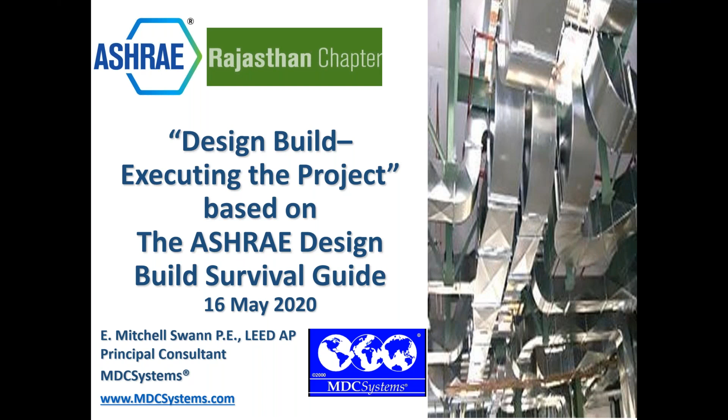So very quickly, our learning objectives today. Basically, we're going to try and get an understanding of the design build execution strategies, some methods to get it done, some concerns and cautions, things you need to watch out for. Now, as I understand it, design build is becoming a much more popular execution strategy in India and actually around the world. And there may be some aspects of our current condition that accelerate some of that. But one of the things about design build is it is a collaborative kind of process, and human cooperation can be both very useful and at times not so helpful. So that's a thought to consider.

So I don't know how many people are familiar with design build or have done it, but design build is a process where the design build entity holds all the contracts with all the trade contractors. It also holds the design contract. So the design build entity, and I say entity because there are different ways they can be formed, has all the risk of performance, design, and workmanship, as well as cost. Okay, so they basically carry all the risk. The owner hopefully gets a single point of responsibility. The owner only has to talk to the design builder, and the expectation is it would save time and money on the project.

So, as I mentioned, why do it? That's saving time and money. As you can see from this slide here, and I'll try and illustrate with my cursor, the thing that is predominantly the savings is that whole bidding process is somewhat removed, because with a set of preliminary drawings, one should try and get a full price established and then work through detailed drawings. So at a minimum, you hopefully would save the time it takes for a bid process, a tendering process, or you can save even more, because using a preliminary set of documents, you can begin construction. And so now you are working on portions of the drawings and simultaneously constructing other portions of the work.

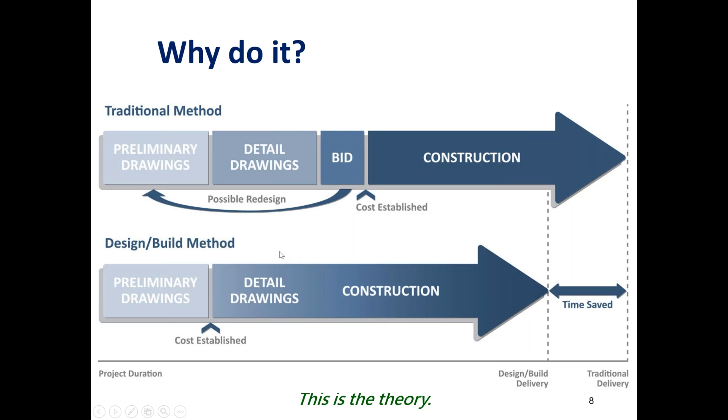So what about the dynamics of the market in India specifically? And keeping in mind, time and money are the two drivers that are making people want to go into design build. Coordinated work, time and money. First thing to think about is that construction makes up 7 to 9% of the GDP of India. It's responsible for about 40 million direct and indirect jobs, so it's a very big component.

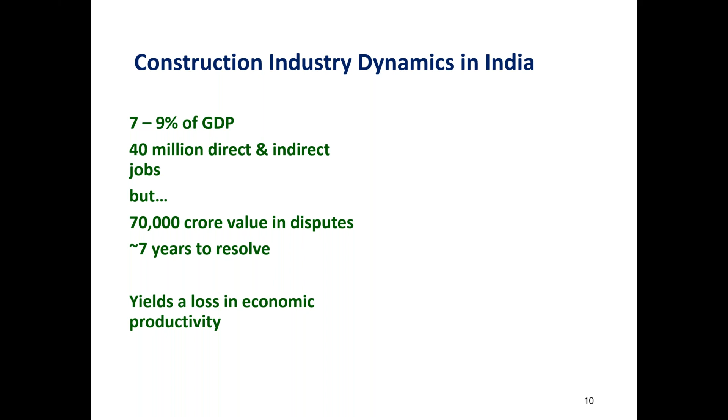Now, one of the big drivers of project productivity loss, number 3 on the list of factors affecting productivity of labor in India, is amendments to the drawings and specifications. And so one of the positive aspects of design build is it should greatly reduce changes in drawings and specifications to the contractor, and that should hopefully speed up productivity, which saves time and money. So that's the big driver.

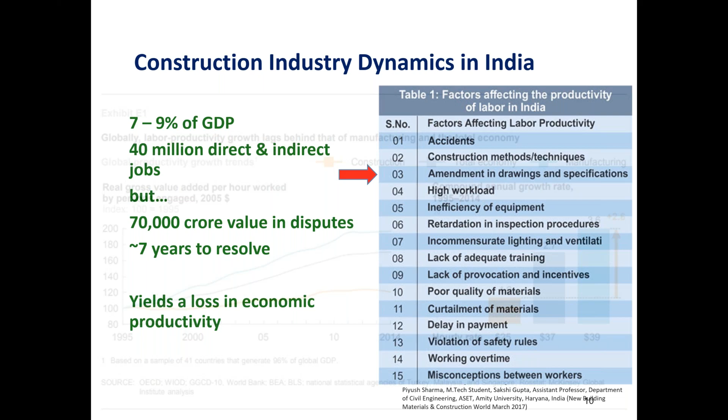Now, how does that relate to construction in general? On a global scale, if you look at this orange line right here, construction productivity has changed very little over the past 30-35 years compared to the manufacturing world, where you see automation and robotics, and the general business or total economy. The financial industries, everyone else has gotten a lot more productive. Construction, not so much. And that is a big problem because that is a difference in value that can add to the economy.

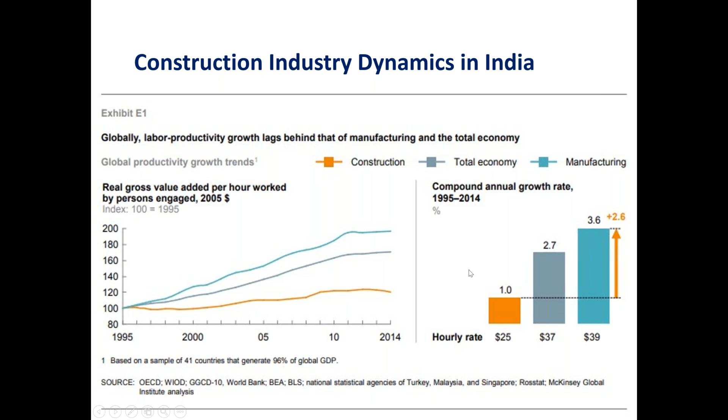But there are some concerns. Why would you not want to use design build? If it saves time and money, what are the possible reasons to not use it? One would be getting professional services, engineering and architecture, by non-professionals or people who are unlicensed. Unlicensed practitioners can be a problem. In most instances, licensed engineers and architects have an obligation to protect public health, safety, and welfare. That's a component of their license.

An unlicensed practitioner, a person who's not an architect but pretending to be one, and there is an issue with that I've seen from the IIA in India, or a person saying that they're an engineer but they are not, could expose the public health, safety, and welfare. And in the midst of this, as we deal with the COVID issue, you can imagine how that might become even more important or more sensitive to people.

There is also another concern. Typically, in the design, bid, build world, you have an owner, a contractor, and a designer. And the owner has a separate contract with each. And one of the things that you hopefully get out of that is a dynamic tension between the designer and the contractor. Contractors tend to focus on cost and schedule. Designers focus on different things. They may be looking more at long-term operation or reliability or other things that are not as easily placed in dollars and cents immediately.

Especially with owners that don't have a lot of experience, there can be some issues with their understanding of what things cost and what it takes to get a project done versus their expectation, what we often refer to as champagne taste and beer money. So that can be an issue. And that is more prevalent when you have an owner that does not have a lot of experience in building. They don't know exactly what things cost.

Then there's also this issue of, since you don't have full specifications, you have questions about substitutions. Can you make substitutions? Are they really substitutions? If you're a design build firm, what was the owner expecting versus what you're intending to deliver?

Now, this is an area which I think actually occurs on all types of projects, but keeping in mind that you've established a price very early in the project, if the needs of the project change, an owner changes their mind or starts adding things, you get into scope creep. And I'm sure no one has ever had a project where the requirements have changed throughout the project. I think that happens to everybody.

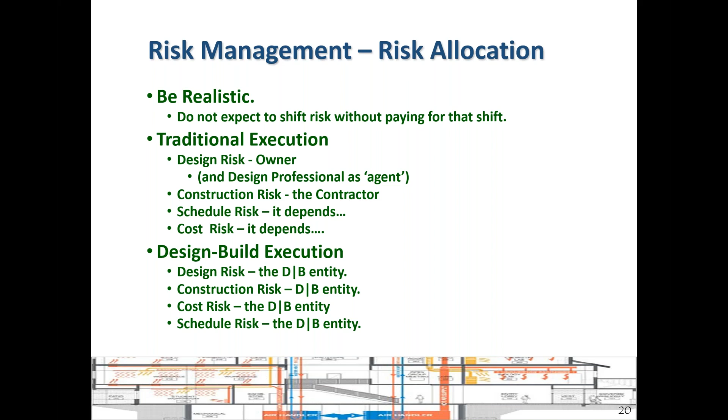So now, setting up these business entities. Corporations are a structure, a separate structure. You need to think about how it's going to be owned, what's going to be the risk exposure, what kind of assets, taxes. You can talk about partnerships, okay?

You have general partners or limited liability partners, and they have different levels of exposure and risk. Limited liability companies, which is sort of a hybrid between a corporation and a partnership. And you have different ways in which the liabilities break out. You should talk to an accountant and an attorney to work out the details of those items, depending upon your marketplace. And I understand we have people from different places here.

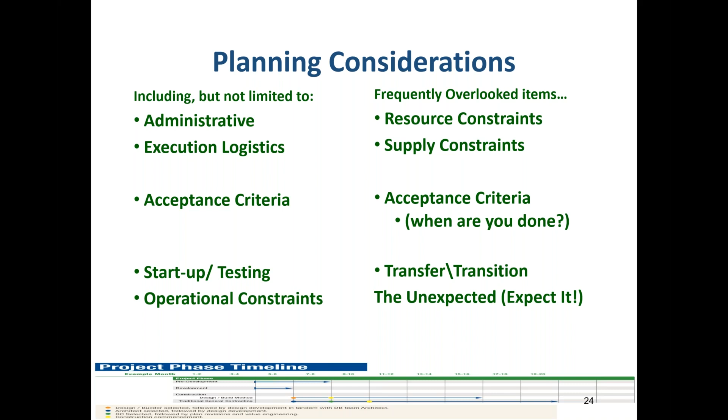So early on, I think it's important to identify your assumptions, keeping in mind that you do not have full documents. You need to think about your resources, labor, materials, and equipment. Can you get things there in time? Is there enough qualified labor to get the work done? What kind of project conditions you might have. Infrastructure, existing infrastructure. Is there sufficient infrastructure to get the job done? What kind of transport or communications you might need. And then there's other things.

If a client has an existing series of buildings, they might wish to use the same control system or limit the type of equipment that you can use in order to have consistency across their platform. That is very useful for an owner and it makes a lot of sense. But if you haven't thought about that in your proposal, you could find yourself having trouble with pricing or deliveries.

Okay, if he says, well, I can only use a certain manufacturer for all my pumps. I did not price that manufacturer. I'll have to go change my numbers. So you need to be very careful and clear about what you're putting in your project. As I mentioned, the neighbors, what are the conditions that I'm going to be constructing in? Okay, and then of course the testing and turnover and what the economic drivers are for his project.

So some concerns for the designer. As I mentioned earlier, there is that sort of tug of war between construction cost and schedule and design intent. And it is very important for designers to remember that in the design build context, they are a partner with the contractor as well as, let's say, working for an owner.

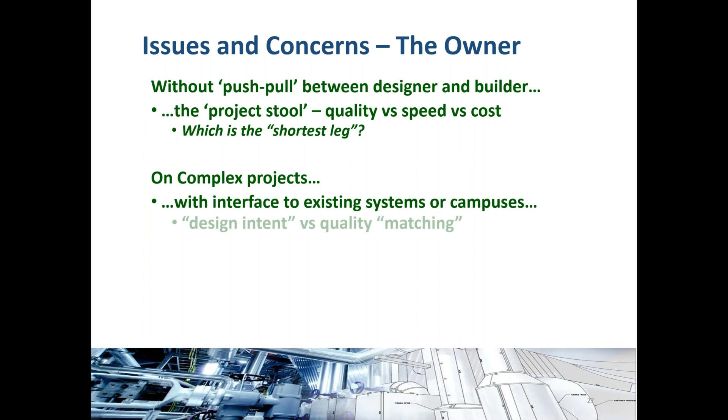So from an owner, without that push and pull, that tension, tug of war between designer and builder, projects can be often talked about as having a project stool. You have, I can do it very well, high quality. I can do it very fast, high speed, or I can do it for very expensive, high cost. You can control two items in there.

You can talk about quality and speed, but the cost will change to satisfy those requirements. You can talk about speed and cost, but your quality will change to match what speed and cost you have. So you have to be conscious of what you're trying to control to, okay? Typically, builders think about speed and cost. Designers think more about quality and cost. And so you can have a little bit of a pull as an owner. If you don't have internal people who can help you with that, you could run into a problem that way.

On complex projects where you have to match up to existing systems, there is a question about getting the best price on your design build project versus matching up to your existing systems. And then of course, as an owner, you have to have very strict self-discipline. You can't let yourself change your mind constantly on the project.

But what is a good useful thing to do is get unit cost pricing data or a menu schedule of values for certain elements, or you can put a cost allowance in for areas that are on hold or awaiting some detailed design, okay? Areas where you might not be certain. That pops up in high-tech buildings like hospitals or laboratories often.

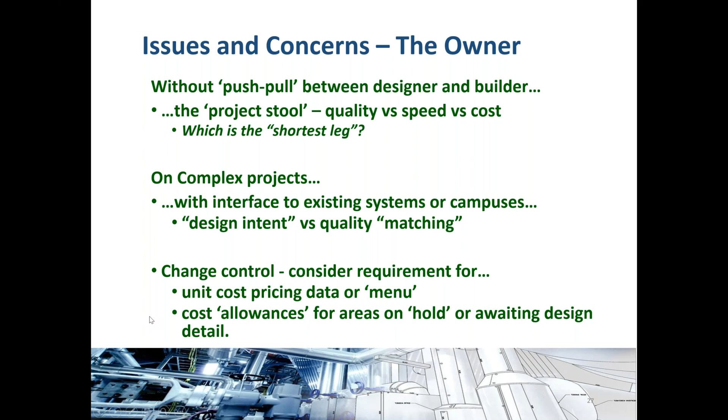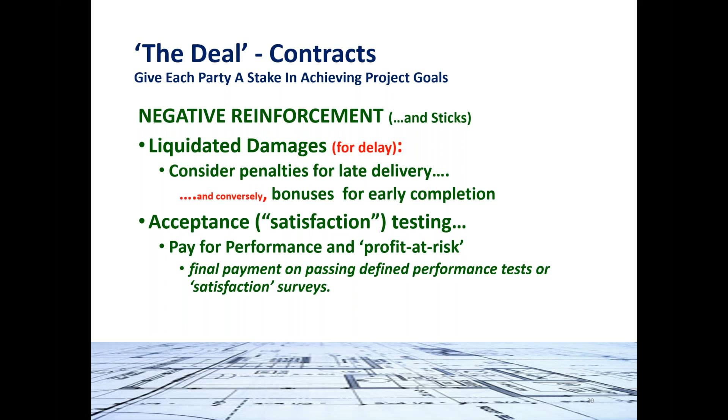In India, I looked into the contract world. I don't see a lot of standard contract forms, but it seems that FIDIC, and I don't know if people are familiar with FIDIC, is used fairly regularly in the industrial market in India for design build work. This would be FIDIC's Yellow Book, and that comes out of the International Federation of Consulting Engineers, which is headquartered in Switzerland, I do believe. But FIDIC, I've seen a lot in international work.

And then there's the Indian Institute of Architects. They have a set of contract documents, but I've not seen a specific design build contract document amongst them, but that might be a way to go. You can look into American forms too, but there's one other that I'll talk about a little bit later.

So, utilizing it effectively: team skills, owner experience. Does an owner have experience with design build and how it differs from design bid build? That can be important. Your design build entity qualifications. Are you familiar with the type of work? Are you familiar with each other as you're forming an alliance?

Do you have the proper incentives? You want to make sure people are motivated in the right way. And you want to try and have as much of an alliance as possible and not strictly a business relationship. You want to have a strong working relationship, okay? You're going to have an integrated planning process. You want to bring people into the project early. If you're going to do that type of work in design build, you want to get cross-disciplinary involvement on your team.

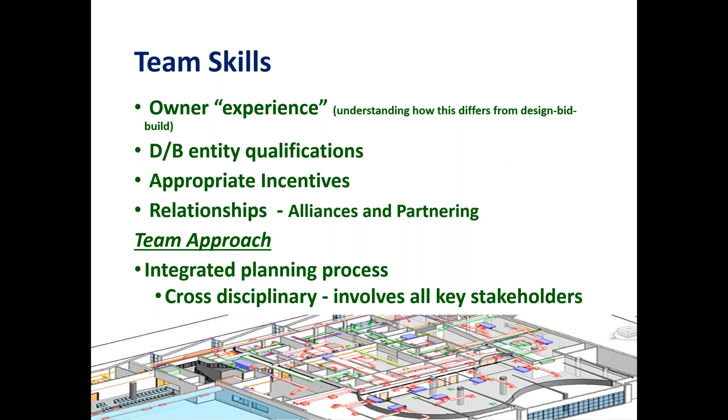Why is planning so important anymore? Projects are a lot more complex. We have a lot more high performance targets. People are looking for sustainable buildings or net zero buildings and things like that. That requires a great degree of sophistication, okay? Adaptability. People want future proofing. They want their buildings to be able to live into the future, adapting and changing with different requirements.

New pressures on things like resiliency, because changes in the environment, changes in climate, floods, things like that are making it much more critical to think about early planning so that I can deal with these kinds of abnormal situations. And of course, the integration aspect of getting the project delivered well.

It's always important, and one of the drivers of design build: how quickly can we get this project done and online, and what is the return on investment or life cycle cost for the capital expenditure. So time and money continue to be the drivers of most of these projects, but now we have these other outside or additional elements that people are looking for. So planning is key.

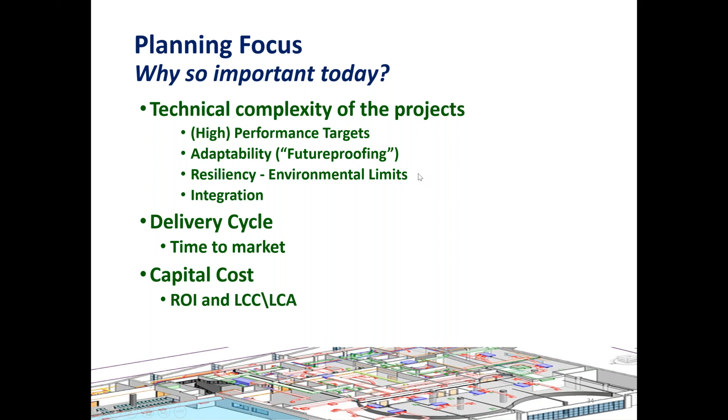A design build project is often basically a performance project. So it's very important to understand the scope, what is going on, what you're providing in the project and what you are not providing, okay? And I think a lot of times people do a pretty decent job about what they are providing, but they are not very clear about what they are not providing. And sometimes it is hard to determine exactly where the break line is. So you need to be careful about what you're not doing, okay?

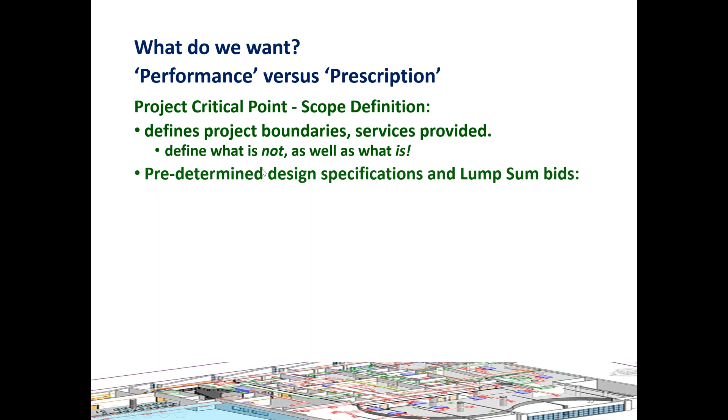There are some projects you have to be careful about, because a lot of design build work is done with a lump sum bid, okay? And so it's very important for you to manage your process to keep in line with that lump sum. And you need to be careful about implied or expressed warranties.

From an owner's perspective, you should be looking at capacity, you should define quality level and some performance requirements. You should be clear about what you want post-construction, what kind of training, how long you want them to be on site, or as a warranty goes, and what kind of documentation you want, okay?

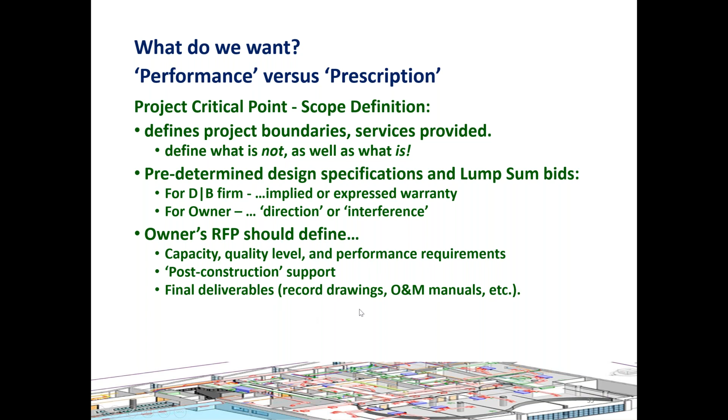Because remember, you don't necessarily have the same sorts of things that you'd have in a design bid build project going into construction. So you need to tell the design build entity, I want record drawings, I want as-builts, I want O&M manuals, because there's no specification to tell them to do that. And if you have some goals or testing or acceptance criteria, you should specify that in writing.

Schedule compliance, critical element. It's very critical, and for the design build entity, you're going to be responsible for that. If there's spots where you need the owner's input, indicate where on that schedule you need them and where they need to make decisions. If they don't make certain decisions in a certain time frame, you have to document that event, tell them what the impact is, and let the owner know, because it's very important that the owner make timely decisions when necessary, okay?

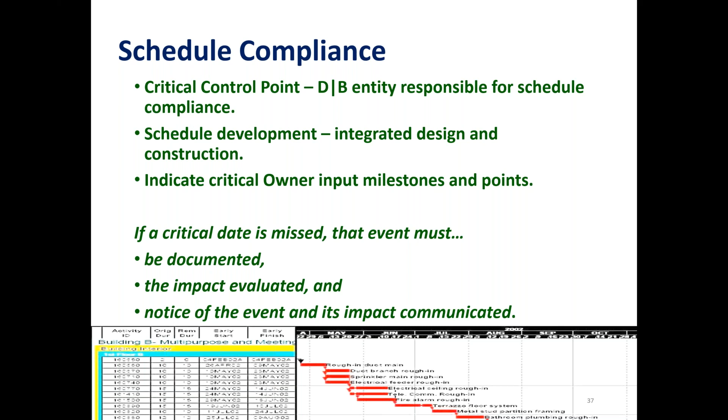As I mentioned before, you're going to have less design documentation when you start the project, but at the end of the day, the same work is going to have to be done. So it's good to think about how you're going to manage that value, okay?

The type of documentation will vary from project to project. What I need for a commercial office building may be different than what I need for a hospital. More complex projects tend to require more detailed scope documents or RFP information. You'll see something referred to as a two-step design build or a bridging set. And in complex projects, very often there's a bridging set of documents. It's a more detailed RFP than just what's written on a page. It's going to be maybe some more complicated drawings and things like that, okay?

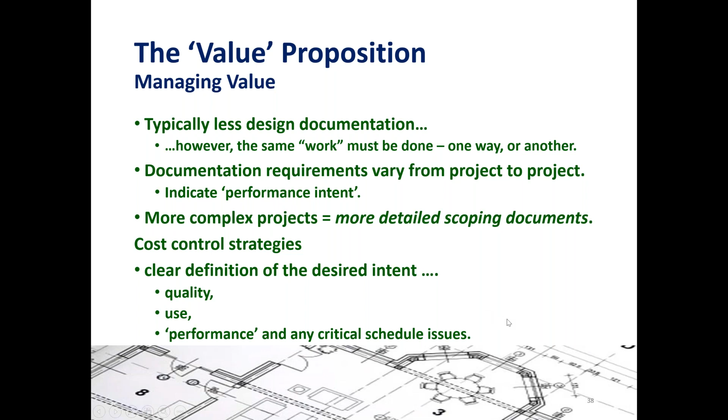You need to think about your cost control strategies, the desired intent, what you're intending to do, the type of quality, how you expect to use it, and any sort of performance or critical schedule issues that you see in the project.

Okay, so from a delivery perspective, clients in a design build sometimes think that they get to step away and not have anything to do with the project. That's not true, but also they can't get so involved that they eliminate the flexibility that design build gives you, okay? So you have to be very conscious to guard against scope creep or change orders, because it's very difficult to negotiate prices on change orders in design build. They often end up very expensive. Clients, owners, you have to be careful to not have your people interfere with the ability of getting the work done, because that's going to cost time and money.

Now, a question is, as I mentioned, you don't have that tension, that tug of war between design and construction. So how do you as an owner get the quality that you expected, or get the quality that you paid for, what you thought you paid for? That's going to be up to your RFP, your request for proposal, or request for quotation that you issue out, okay? You can't determine the construction means and methods. If you do, you potentially impact the cost. If you want something done a certain way, you need to define that up front.

The quality control and quality assurance, in large measure, the design build entity has to self-referee their performance, because they don't have an outside person. There's not a contractor having an engineer come in and make comments, or a contractor making comments on an engineer's design. It's all one entity. So you're self-refereeing, you're self-controlling.

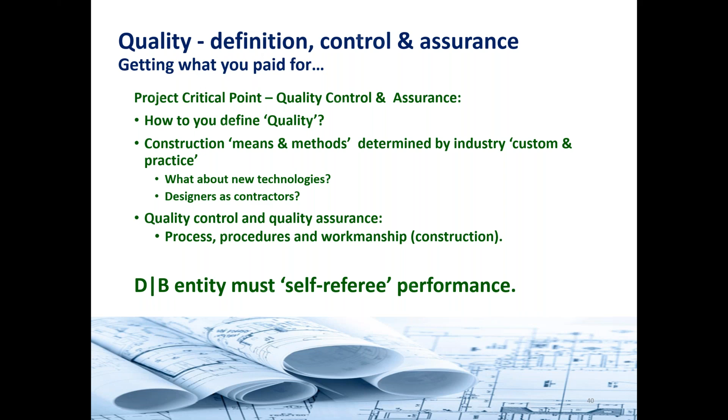Any additional risks? For the design build entity, price risks of products in the marketplace, schedule guarantees, if you have a plant performance guarantee, there could be some sort of site-specific risk, obviously logistic and safety. Those are always things in contracting, but for a lot of design build firms, engineers in design build, they're not used to thinking about these. They don't usually deal with those items. They don't deal with price risk in the marketplace, okay?

For an owner, you will still have site conditions, generally speaking. You will have any legacy issues, things that they're connecting to. An item that does pop up on occasion is who owns the design from an intellectual property perspective. If you put one building up as a design build, does that owner have the right to take those same documents and go bid to do another copy of that building someplace else? That becomes an issue.

Dispute resolution. One of the goals of design build is to reduce the number of disputes, okay? There are disputes that come up. Portions of that come in a failure to meet, let's say, the owner's intent. And that is because the RFP might not be clear about what the owner's intent is. If there's a hard schedule, for example, you're doing a school, there's a very tight, fixed schedule. Failure to meet schedule will be a dispute.

Failure to meet a budget, and that can be a very complicated argument, because if I've given a budget and it's a lump sum bid, a hard price, the owner has not interfered. If it goes over, that's an internal problem for the design build firm. And I've actually seen those issues pop up regularly where the contractor feels that the engineer that was subcontracted with him has problems getting the work done.

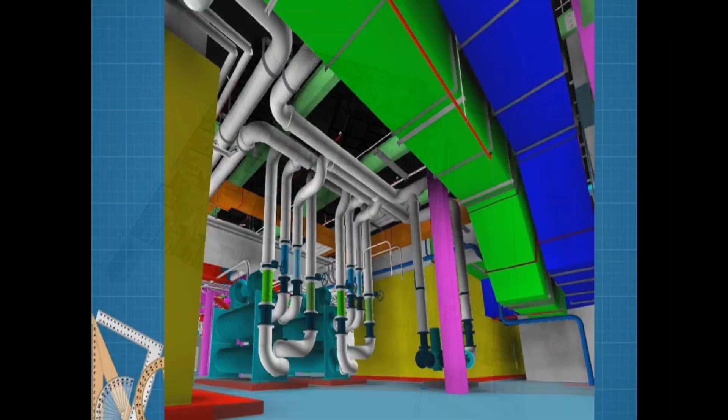If you do your VR, virtual reality, well, you can actually have an owner put on those little glasses and almost experience being in the room before you build things. It's a great way to control, oh, I didn't know it was going to work like that, or I'm not comfortable with XYZ, before you build things. It takes a bit more time at the front end, but it hopefully reduces the amount of problems at the back end of the project.

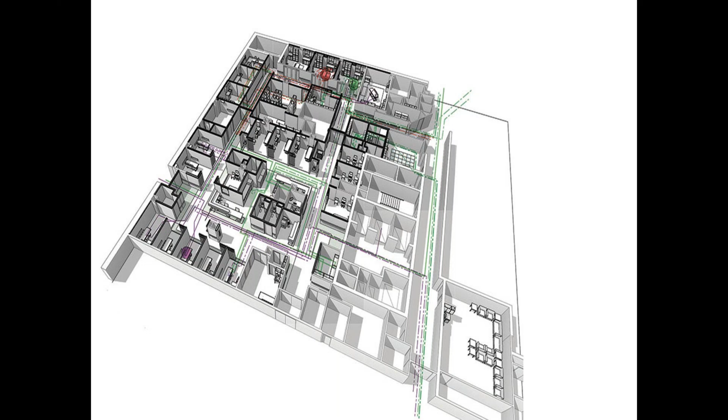In the world of BIM, there's sort of the 3D version, which is just sort of the model. But you can talk about 4D, where you tie the model to scheduling elements. You can talk about 5D BIM, where you're tying construction schedule as well as pricing, okay? 6D, where you can start doing energy models and other things like that, predictive energy models or operating energy models based out of the model, okay? And then 7D is where an owner is really using it as an asset management tool.

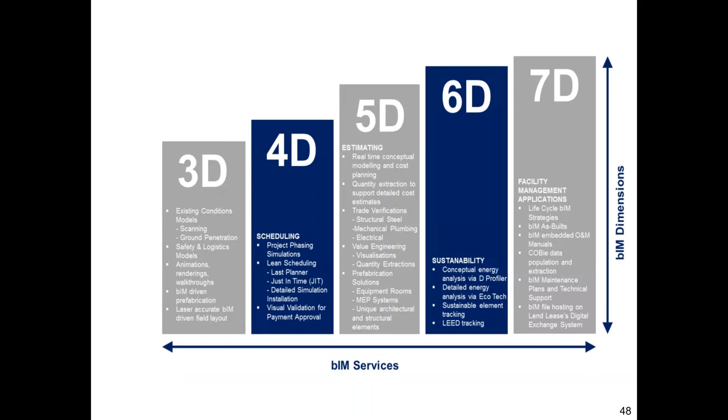We are slowly seeing, and I would say right now we're comfortably in a lot of projects, 3D and 4D, and 5D is creeping in. People are using the sustainability models, but they don't use them as an ongoing operating tool, but this 7D is coming. Another area, you start hearing about people talking about digital twins, okay? You can build a city block, you can build a whole complex as an electronic model, and then you can compare that to what your actual is doing. That's where the industry is going, a high technology industry. And the purpose of that is improving productivity and cost performance.

I suspect you are seeing more and more in India off-site or modular construction. That's going to be another big element. And that, of course, has a lot of tie-ins to BIM. Because of BIM, I can do modular construction in a great way. And there's a lot of advantage to that. Quality is better on a factory floor than it is out in the site. It's safer, and I can deliver things quickly. Some drawbacks. It's not very good for dealing with changes because I've already made a bunch of stuff and brought it out to the site. So it's not as flexible, but improved quality, lower cost generally, and faster delivery.

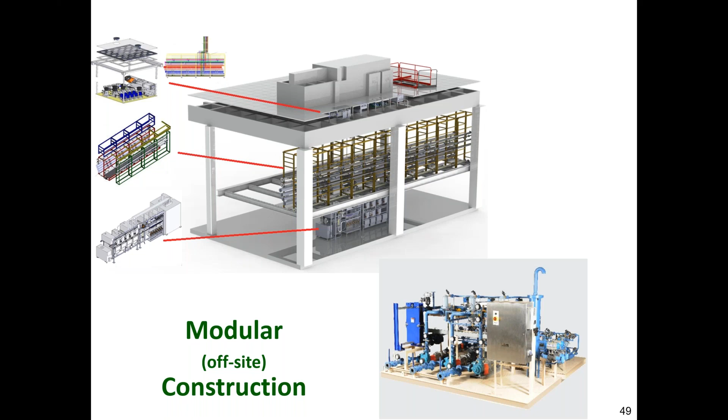The modular construction market is growing. You'll see it a lot in health and housing, but now you see it more in hospitality, healthcare, educational institutions, and the Asia Pacific modular construction market is projected to be, well, this is 2018, about $20 billion. But as I mentioned, improved productivity, better quality control, and reduced waste compared to on-site fabrication. It's going to be a big thing. BIM helps it.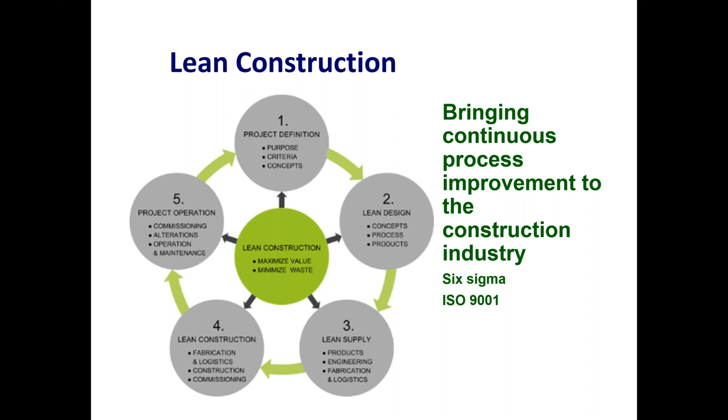I don't know how many people have heard about lean construction. Lean construction is an approach to delivering capital projects in the construction phase. It's like a Six Sigma continuous process improvement for construction. Back to that chart I showed where the productivity of the construction industry has been relatively flat for about the past 35 years, where all other productivities have improved. This is an effort to improve that and have less waste in both time and effort and material waste on the construction site. Lean construction is the thing you're going to see. And to an extent, design build overlaps with lean because of that coordination and better communication between members of the team.

Other types of projects that you'll see. Design build is here, okay? But you have variations on design build. Design build finance, design build operate, maintain, okay? Those are all variations on that theme. Design build transfer. You'll see that happening much more in the world of public-private partnerships. And you're probably seeing PPP jobs go on as people, especially municipalities, try to find ways to execute projects with limited capital. So that's going to be a bigger thing. In order to participate in that, you need to be able to participate in some of these components. When you start talking about finance, that usually requires bigger firms because they have better finance capability.

An item I kind of touched on: has anyone worked with the New Engineering Contract? It is a contract developed by the UK Institution of Civil Engineers. I've seen it used in the UK, Australia, New Zealand, Hong Kong, and the Republic of South Africa. Its big points are plain language clauses. It's very simple, not a lot of legalese lawyer talk.

It's very modular, so you can take portions of it and add sections together to get the kind of project you're doing. It's very adaptable, and it's very much focused on collaboration and alliance work. The first was the NEC3 family, which I think came out in 2005. But recently, there's the NEC4 new members.

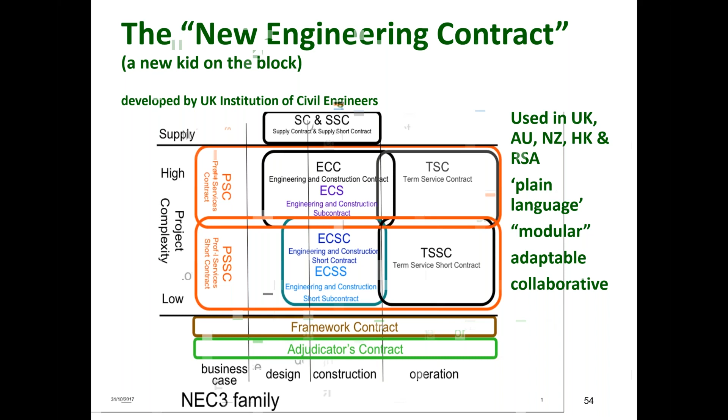They've added the alliance contract, which is partnering, integrated design, integrated project delivery basically, and the design build operate contract component. So now they have express sections for design build contracts, and they have a section on dispute resolution services. So I think these are both good areas to investigate as an alternative, especially if you have a client that doesn't have a lot of experience or doesn't have his own contract.

If we can start talking about doing on-site execution and improve that and employ some technology, we can see some significant improvements in construction productivity. And that's the name of the game, construction productivity. We want to try and get it to be more productive, save money, save time.

Now, some impacts of COVID. I think COVID-19 is going to change some things. There's going to be some additional crew safety measures required, which is going to increase the amount of disposable equipment, masks and things like that, little gloves that you previously didn't use. And they're going to have to do that because you can't have half your workforce sick all the time, or a quarter of them. That's just no good.

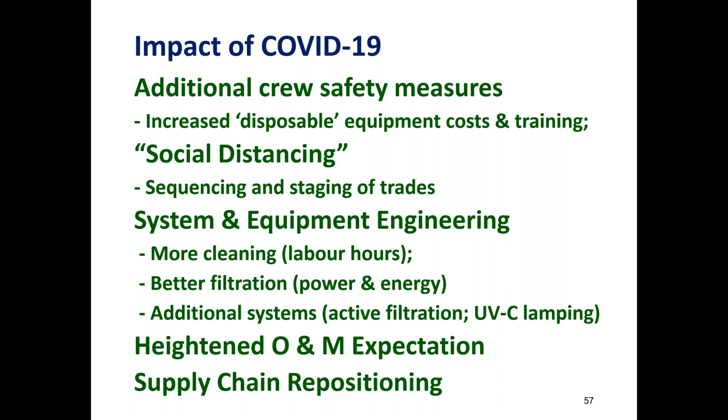So with that, any questions or discussion or whatever, we can delve into that.

Yeah, thanks, Mr. Swan. There is one question. How successful is design build with peer review and a commissioning agent? Would this not be a win-win model?

The commissioning side can become an interesting one, and that is because, as well as peer review, since you don't have a lot of documentation up front, the peer review can be of limited value. I think the peer review actually, if an owner wants to do a smart thing, you would have a peer review of the RFP to make sure that it's actually asking for what needs to be asked for.

And it might be wise, and I've seen this happen, and I've actually worked on a couple of resolving disputes where it would have been beneficial to have a peer review of the design provided by the engineer who was subcontracted to the general contractor, because the design ended up having to be changed and it created some major cost problems in getting the project done. And there is no ability to go back to the owner and ask for more money because they bid the job as a lump sum. So now they have to find a way to solve it.